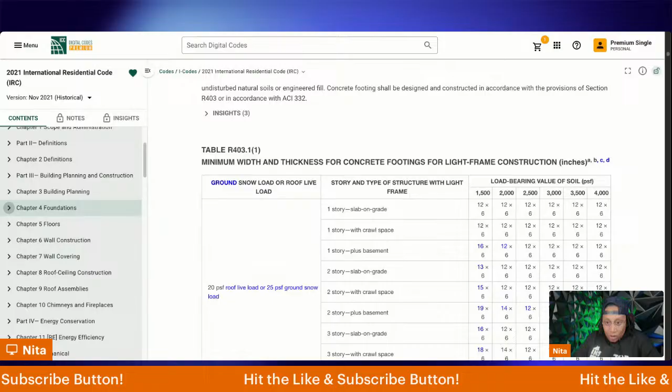Well, this table gives you a specific design requirement for the width and thickness of your concrete footer. Okay. Chapter 5 gets into floors. So for my students, again, we covered this in structural when we got to floor systems, wood floor framing. We know that the floors are going to be constructed of dimensional lumber, right? We know that we got our bottom plate, and see here in the diagram, these squares here represent the vertical structural members, which are your studs.

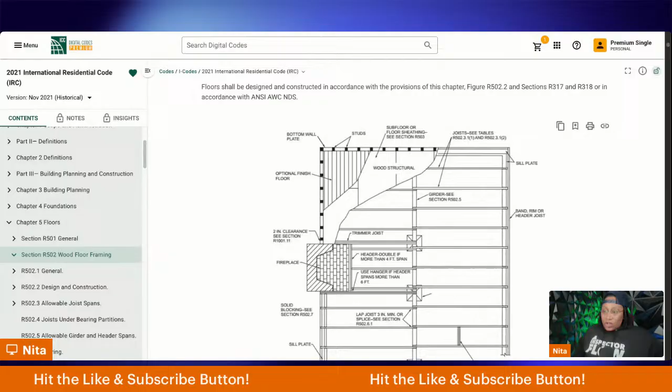Studs are set to be installed how many inches on center? And so this is actually a really good diagram to practice on, again, I'm talking about my students who've already learned this. Your sill plate, the foundation, your fireplace. Remember the clearance to combustibles requirement. See here, if you've got a wooden stud, it can't be right next to your fireplace for obvious reasons.

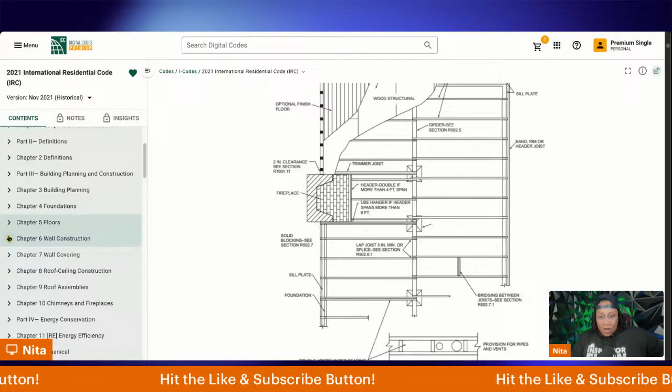And then in chapter 6, we've got our wall construction. Same thing. Wood wall framing. Chapter 7 is wall covering. So that would be more like the interior. See here, 702 interior covering. So your drywall. Interior coverings shall be installed in accordance with this chapter and these tables.

Okay. So if you got plaster, gypsum, cement plaster, the application, how long it needs to cure or sit, the materials, all of that.

And then it also has the exterior coverings as well. Where did I go? Wall covering, wall. Where is, oh, right here. Exterior covering R703, exterior wall coverings. We spend a lot of time in Inspector Flow talking about these, right? How they need to stand up against wind and also water. Obviously, your WRB, water resistant barrier. Okay. One layer, we learned about that, the layer of the wood on the outside of the house.

Over top of your wooden studs, you want to have your sheathing, and then your water resistant barrier, your soffits, the trim. Look at this. Again, you are familiar with all of this if you are an Inspector Flow student. So that is a good thing that you have that foundation.

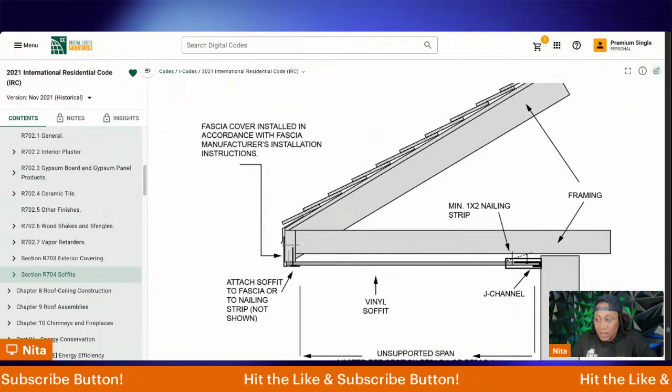Chapter 8 goes into roof and ceiling construction. So that's our rafters, our sheathing, our underlayment, all of the requirements, wood roof framing. Okay. So that's talking about your rafters, the lumber, wood treated, moisture. See, rafter size. Rafters shall be sized based on the rafter spans.

Okay, so you learned again in Inspector Flow that the first structural layer of the roof is the rafter, but this table gives you the specific size that the rafter should be based on the rafter spacing and also based on the species and grade of wood that you are dealing with.

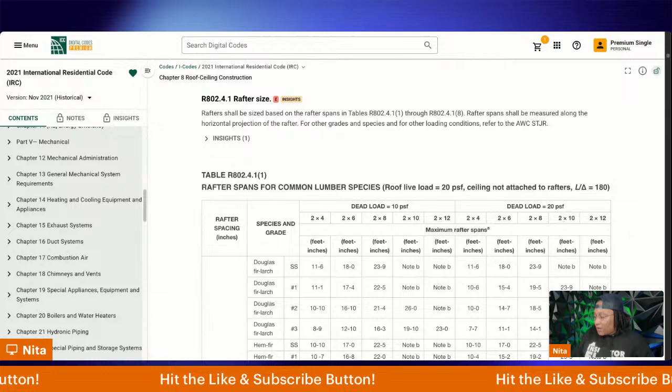What's up, Viv? If you do 2x6s, you can go 2x4s. Okay, yeah. For your studs. Okay, Viv. So you got the 21. You got this one here.

Who else? Does anybody else have a copy of the book? Do you have hard copy or do you have digital? If you have hard copy, do you have the tabs? Are you tabbed up? Are you tabbed up? If so,

where we at? Chapter 9, roof assembly. So this is your actual roofing materials, the slopes. Let me come up some. Your flashing, the ventilation. So see materials here. And then underlayment. Underlayment for asphalt shingles, clay, concrete tile, metal roof, mineral surfaced roll roofing, slate type, wood. Basically, the underlayment requirements are here. Okay. See the types. This is all stuff again that we learned and that we talked about.

And then chapter 10, chimneys and fireplaces. We just finished our fireplace and chimney. So you've got the same thing that we covered. Masonry fireplace. Did we not go over this? Your hearth, and then you have the hearth extension. And the hearth extension, the size of it depends upon the opening of the firebox. So if it is less than 6 square feet, or if it is more than 6 square feet, which is right here,

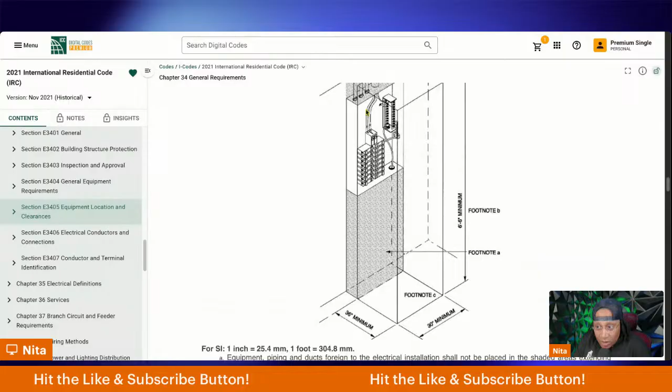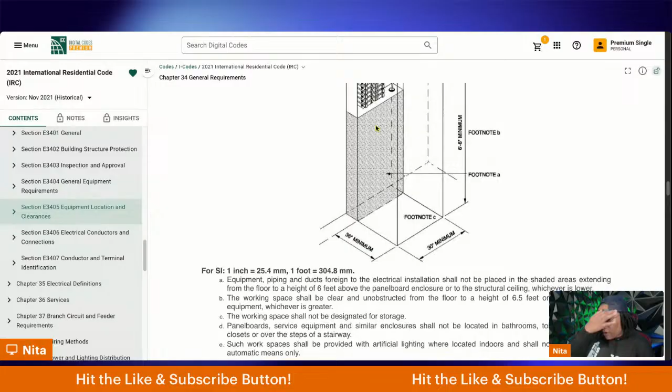And then chapter 34 through 43 is your electrical. So we start off here with your basic equipment. So your circuits, your panel boxes, enclosures is the proper term. Location, clearances. Remember this. This is a question that always comes up. NHIE or ICC, they're going to ask about the working space, your clearance in the working space. Okay, so remember, in front of the panel, you got to have 36 inches at a minimum, or 3 feet of clear working space in front of your panel.

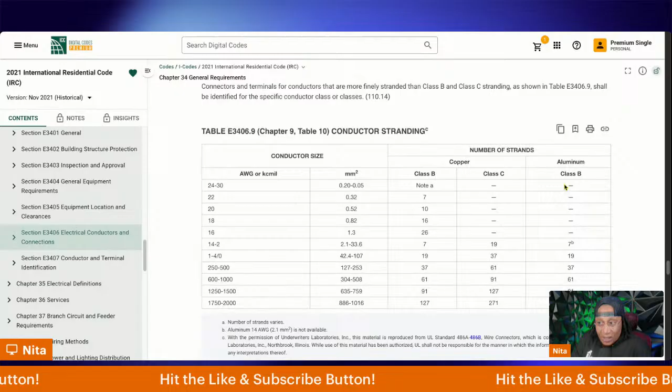It goes into conductors, size of conductors. See here, conductor size, if it is stranded, copper or aluminum, terminals, splices. What is the splice that we talk about outside? There's a splice that's significant to us and it's outside. Which one is that? What is it called? What is the significance of it?

So you see how it works. There's only 60 questions. So you'll get a couple questions from all of these different, from the 10 major systems. They have it broken down. Like for electrical, there are multiple chapters for electrical covering different things, but you're still only going to see a few electrical questions, a few plumbing questions, and they're going to ask you those administrative questions. So again, that information in chapter 1 that you have not studied, that you are not familiar with, you would want to get familiar with that and know about that.

And then down here at the end, they have these different appendices. These are like optional chapters that jurisdictions can choose to adopt. Some states do, some states don't, but ICC still wants you to be familiar with them. So this is like swimming pools and patio covers and different things like that. More specific, radon here, as you can see. So again, you want to know that it's there, so that if you get a question, you can know where to find it.

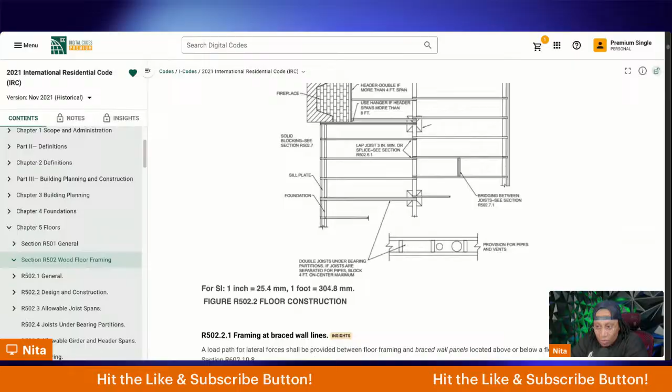And then I actually feel like this one probably even more. So that fastening schedule and then joist span. I think these are popular tables to ask questions about, 502.3. Oh, here it is. Floor joist spans for common lumber species. Okay. So this here on the left, let me pull this over.

Okay, so first we're gonna read again. The question asks us something about floor joists. That's the key word. Key word is floor joist. If you're using the digital, you obviously should be in chapter 5 where it says floors. See, chapter 5 is like this, and then you unroll it and you see all of the sections, section R501, 502, 502.1, 502.2, etc.

So if they're asking you about floor joist spans, my first guess would be to come to 502, the wood floor framing. Now, when I look at the subsections of 502, general design and construction, allowable joist spans. There's my keyword right there. Let me go here. And as soon as I go there, boom, I have this table. So this is the part that you have to prepare for before the test. You have to know what the columns mean.

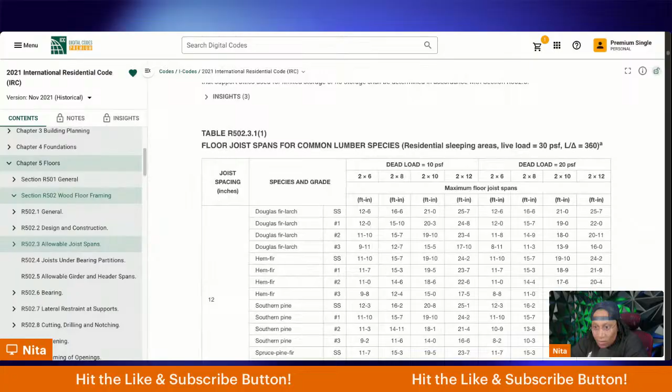And then the rows. Over here, this is the joist spacing in inches. So this represents 12 inches. We're talking about Douglas fir, hem fir, southern pine. And what happens is they will typically give you the species and grade and the joist span, and then they'll want you to come up with the member size, or they'll give you a few pieces of the information and then they'll want you to find the missing one.

Okay, so if they ask you what is the maximum allowable span for a number 2 Douglas fir 2 by 10 floor joist spaced 16 inches on center. So we go down and to the left until we find Douglas fir number 2. Boom, that's right there. And then we move to the 2 by 10. I said 2 by 10, right?

And then I said spaced 16 inches, to the 16-inch on center column. What's the number there? My notes. If I find Douglas fir, grade 2.

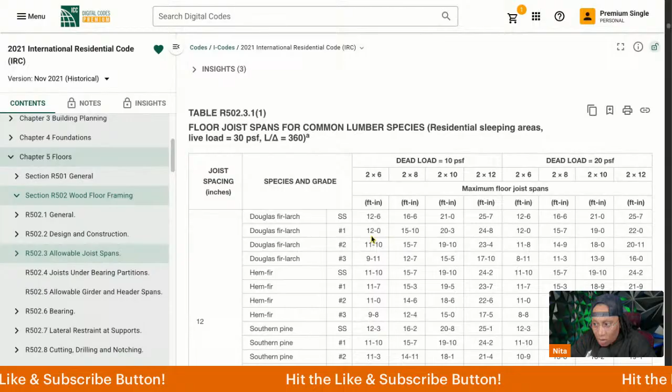Okay, what's the answer? Douglas fir, number 2, or grade 2, right here. And then I go to the 2x10, 16 inches on center. What is the maximum allowable floor joist span? Can y'all see this? Is it big enough for you to see?

The maximum floor joist span. You can only see 12. Oh, can you see the? Well, for this particular question, you only need that one. Let me see. I can't see. Okay, so if you see 16, then you can't see 12. How can I change the size on this thing? Okay, can you see it now?

Sixteen, grade 2, 2x10. The sizing is not working because now you can't see the column headers, right? I am down to 16. You can't see? Oh, it must be lagging. It's hard to see the column headers now, right? Douglas fir, number 2. 2x10. So look, 2x10. 16 on center.

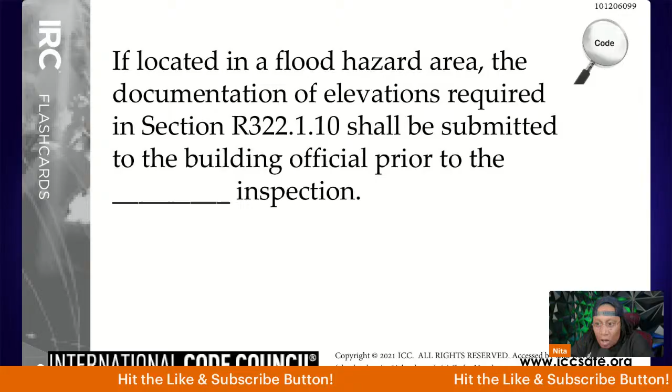Stairway. That's my keyword.

I would look at the choices first and have an idea of what they would be talking about. Then based upon that keyword, I would go and search. What do you think the answer is? Type it in the chat.

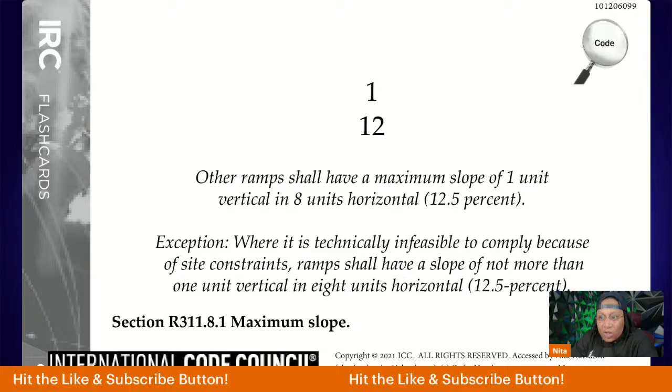I told you. Let's look at one more before the ones that actually have the multiple choice. See, ramps, this is one we wouldn't know because we didn't study ramps. But egress door is the keyword, and it even tells you which section. I guarantee you this is a table question, or maybe not. R311, let me look.

Oh, I gotta go back because I came to flashcards. Say it was just, haha yeah, facts. You see, so again this is one we wouldn't know. You would look at the table. Let me see.

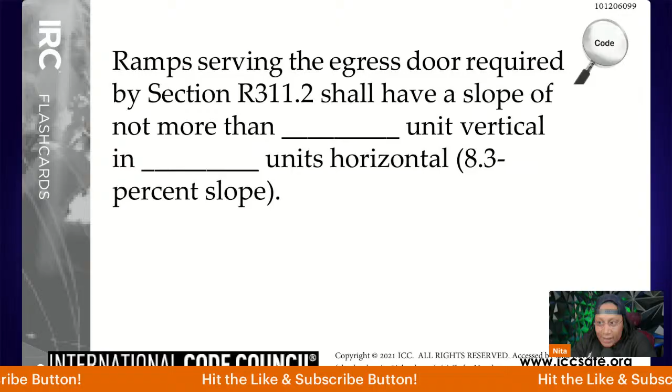Stairways should not be less than blank inches in clear width at all points above the permitted handrail heights and below. This is one we should know, we should be familiar with. What's the keyword? If I had no clue, what's the keyword?

You can't be doing one of these, right? Stairs, we're stairs, like you can't do that. You gotta automatically either know it, or be familiar enough with your tabs to go directly to the spot, or you gotta come to the table of contents. My tabs is so raggedy. And again, you're not going to have enough time to go to the table of contents for each one.

So what's the answer? Stairways should be not less than... so they have to be at least, at a minimum, how many inches in width? The width requirement for the stairway.

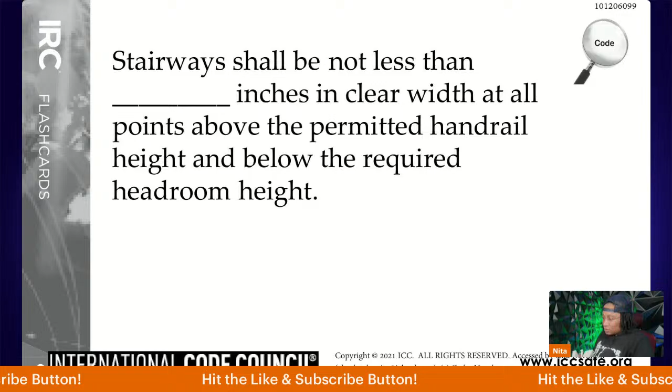36. Wait, okay, they said exception, the width of a spiral stairway. So again, that's one we should have been familiar with. I probably would have looked in the book just to double check, just to make sure I was correct.

Okay, so are there any questions? Let's get to some of the practice questions. I was trying to show you about the different resources that they have. Okay, let me take this down, remove, and reshare this.

Okay, so I was showing you about, there's the flashcards here, and then there's this significant changes section. This is where they give you any significant changes made from one cycle to the next. So any significant changes made between 21 and 24 would be here.

Code notes, are these those? I think these are the same things that I have, yeah, in my, oh no, it's code check. Yeah, I recommend these books. I have these again, these are in the Amazon cart. I have this one, but the 2021. Hold up.

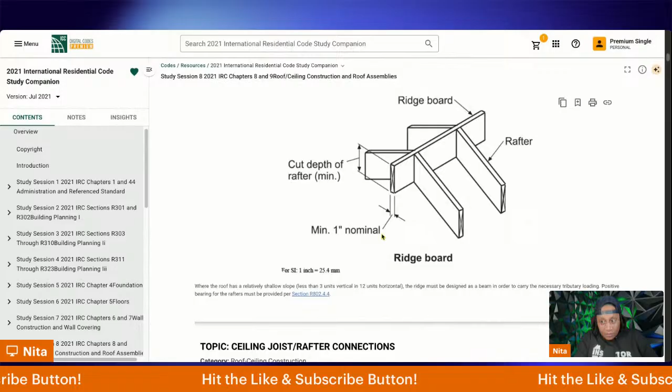Again, these right here are good questions to see if you can answer, just to understand the concepts, not even beyond the test, just to make sure you are grasping the concepts. What do we know about our ridge board? Minimum of 1 inch thick. The rafters should be directly opposite. If not, if they're going to be offset, they can be offset only how many inches?

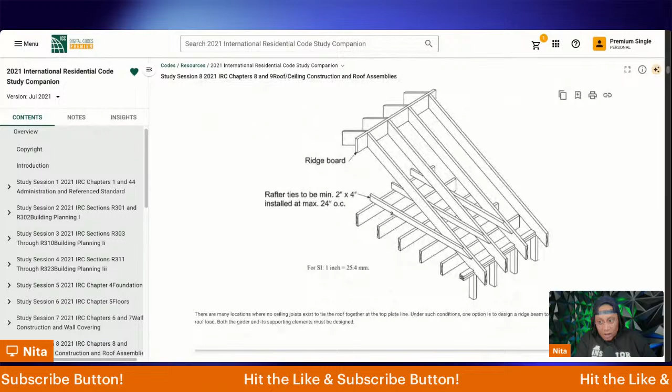The cool thing about these study companions, though, is down at the bottom they have the questions and the multiple choice so that you can answer. So, on a site having expansive soil, roof drainage water shall discharge a minimum of blank from the foundation walls or to an approved drainage system. Would you have to look in the code book to answer that question? What's the answer?

What's the answer? I think this thing is lagging. How do I get it not to lag?

On a site having expansive soil, water shall discharge a minimum of how much from the foundation walls? Bam, 5 feet. We already knew that. You could have answered that in 15, 20 seconds and been on to the next one.

So you see what I mean about not every question requiring the textbook. That's why, to me, I think it's better to train to be a home inspector, because we learn, in my opinion, the information much more. We learn it way deeper than most people who are trying to take this test. They don't have any, to me, any real working knowledge of these 10 major systems. They've just gotten familiar with the code book.

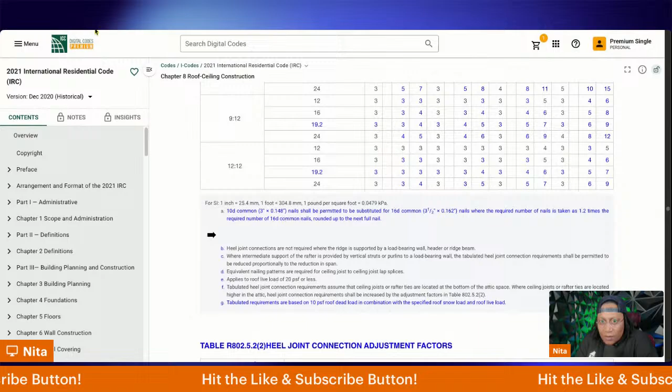3 inches. I actually thought it was A. Shall be lapped not less than, I didn't know that. I thought it was A. So see, this is the one where I think it's 1.5, but I would definitely be going to look. And again, ceiling joists. I'm still talking about structure, possibly roofing. Excuse me, roofing structure or roof assembly. Somewhere in there is where I would be looking. 802. Let me open it. Yeah. Roof ceiling construction. Yeah. Let me come back down. Next.

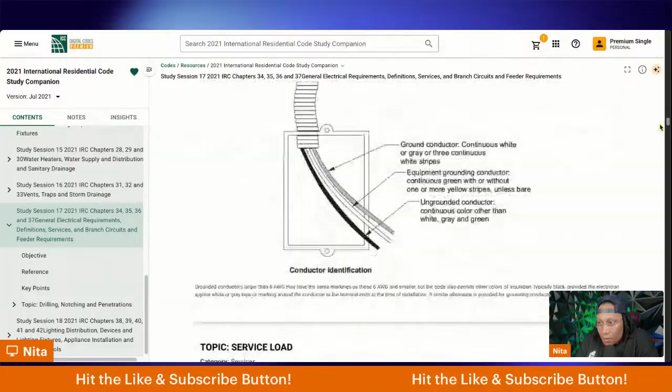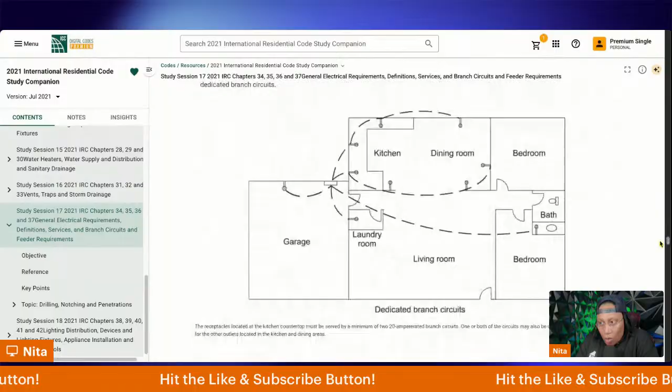Let's go to another system. What other section over here y'all want to go to? Foundation, floors, chimney, HVAC, plumbing, electrical. Y'all want to do electrical? That sounds like a party. Let's see what we got going on in electrical. So these are again your clearance for your service drop. Remember we learned this? Okay.

Energized parts operating at a minimum of blank shall be guarded against accidental contact by people through the use of approved enclosures. So they're talking about any energized conductors or anything that's operating at a minimum of how many volts? We have to protect them or protect us from them by using an enclosure. You know what an enclosure is, right? Oh, so y'all don't want to do electrical? I could have sworn y'all was gonna say electrical. Okay, what's this answer? And then we'll go to one of those.

Energized parts operating at a minimum. If I don't know this, again, I know electrical is in the 30s as far as chapter. I'm gonna start at the general requirements. I'm gonna look for enclosures. That's my keyword. Panel. D. Nicole says D. The correct answer is A.

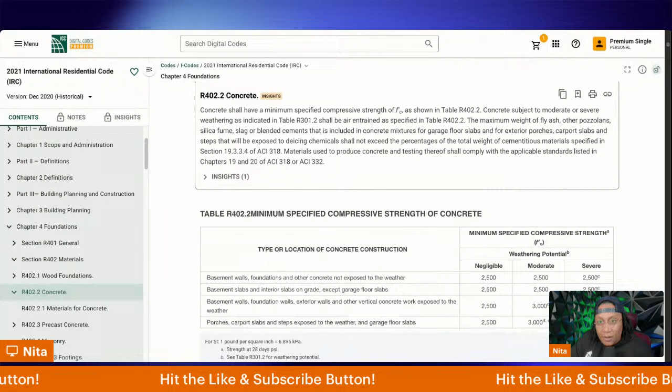Okay, so see, we would know that we were talking about foundation slab. Hopefully you picked that up. Concrete floor, the slab, right? So I will come to foundations and I would come to section 402.2 for concrete. And here it is. Basement walls, foundation and other not exposed to the weather. Okay, yeah, see?

Y'all, we can totally pass this test. You can totally pass the test. I'm gonna be honest. You really can. Peace, Sean. What's good?

Here goes one that you know. Minimum required width and thickness for concrete footings supporting light frame construction for a 2-story. Oh no, we don't know. It's in the table. All of that is too much. Nobody would have that memorized. The answer is in the table for sure.

But we already knew that when we talked about our concrete footings, the minimum width being 12 inches, I believe. Where there is evidence that the groundwater table can rise to within blank inches of the finished floor at the building perimeter, the grade in the underfloor space shall be as high as the outside finished grade unless an approved drainage system is provided.

Where there is evidence that the groundwater table, so we talking about flooding essentially, can rise to within blank inches of the finished floor, the grade in the underfloor space, the crawl space, shall be as high as the outside finished grade, unless we have a sump. Finished grade. I know it's not, but that's an answer for a deck as far as the load it can take.